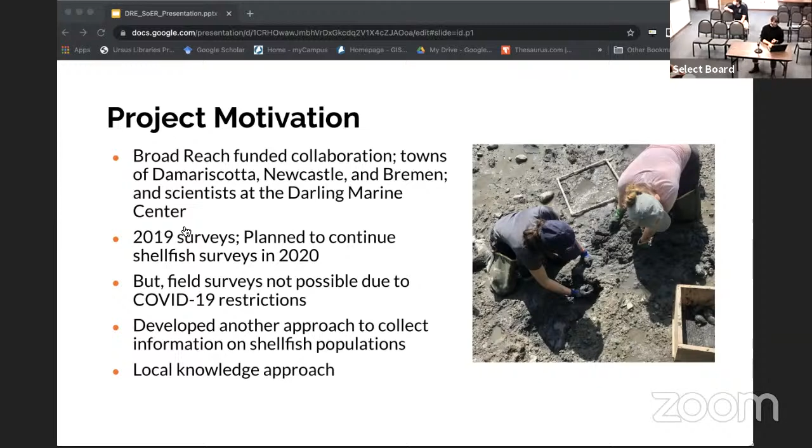So we had to take a moment to step back and think, what can we do where we can still be collecting information about what's happening in the river, but from a safe distance? We figured, why not ask the folks who live and work on the river about what they're observing, so we can collect local knowledge about what's happening and use that to support decision making. That led us to develop a project where the primary goal was to document local knowledge from the people who know it best about the Damariscotta River.

We were looking to collect information about what's changing in the biology, what's changing in human use on the river, particularly what's happening with the clam mudflats. We're also interested in identifying areas of importance. What areas are important for harvesters? What about recreational fishing, aquaculture? What's actually going on? And with a lot of activity going on the river, where are folks interacting and where are areas of overlap?

So to do that, we created a local knowledge mapping study, and this had two parts. We recruited folks over the phone. We had a list of harvesters, a list of local contacts that people recommended. When folks agreed, we sent this map packet in the mail. It had a booklet that looked really similar to the Maine Atlas roadmap, with zoomed-in pages of different sections of the river. Folks could apply stickers showing the locations of shellfish, if they were a shellfish harvester, or different use activities if they were a fisherman or a rec boater.

After folks completed that map booklet, we then did a phone interview with them, gathering additional context about what changes they've observed, what has changed as far as their harvesting behavior, and other concerns they might have.

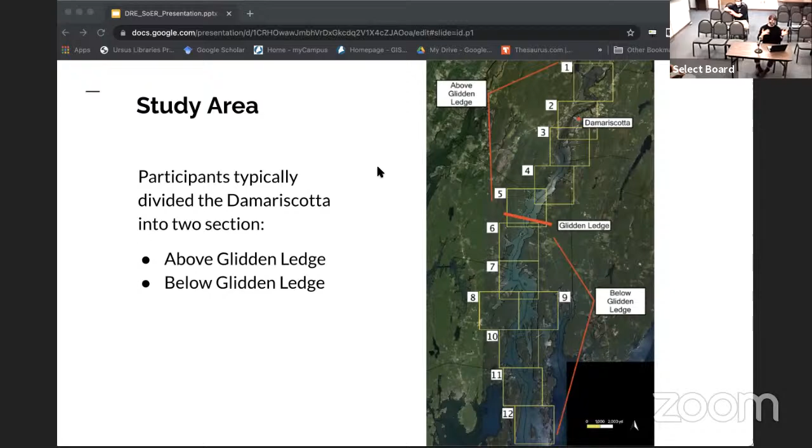Just a quick orientation, because the Damariscotta is a big river—when our study participants typically talked about the river, they divided it in half. Up at the top is the Damariscotta town landing and the bridge, and in the middle we have Glidden Ledges, which is the landmark people use to divide the river. They'll say above Glidden Ledge is the upper river, below Glidden Ledge is the lower river. So we'll be using that today.

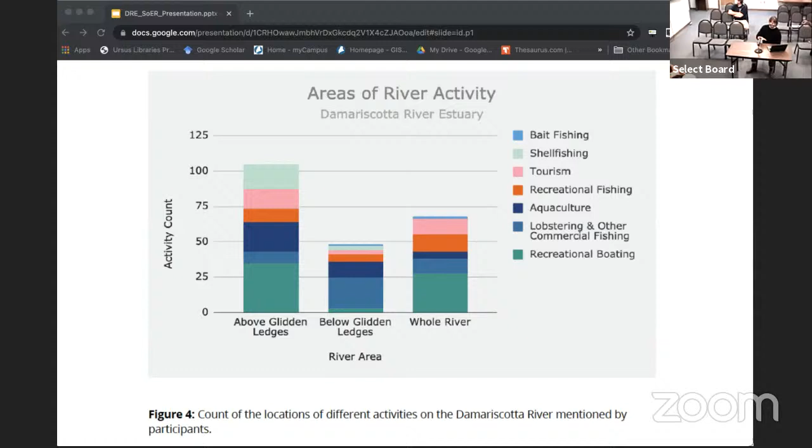One of the really neat pieces we got from the interviews was interesting context about the shellfish species. When talking to harvesters, we got information about which species they're targeting. The main targets are softshell clams and oysters, and then some folks are also harvesting quahogs, and on low tides, razor clams.

We also heard a lot of great information about what habitat they look for, because they don't just go out randomly in the mudflat. They're targeting particular areas with a certain sediment type, a certain look, or a certain zone in the tidal heights. This was really helpful because when we got back into the field this summer, we used this habitat data to target where we actually surveyed, since we're trying to target the shellfish resource, not the entire mudflat. This helped inform all of our survey methods.

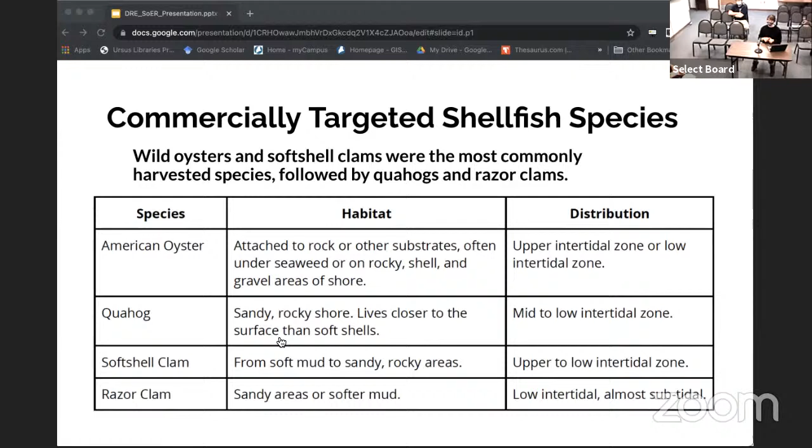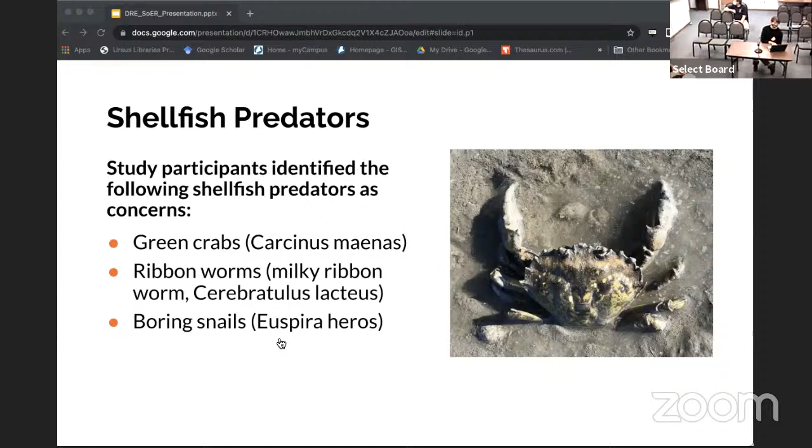Second, folks saw decreased waterfront access as a threat, meaning walk-in access to the flats. Many folks are now buying boats instead, but then they sometimes have trouble putting their boat in at the town landing to get out to the flats. And finally, predation pressure, those green crabs, snails, and worms they're worried about as a threat to the resource as well.

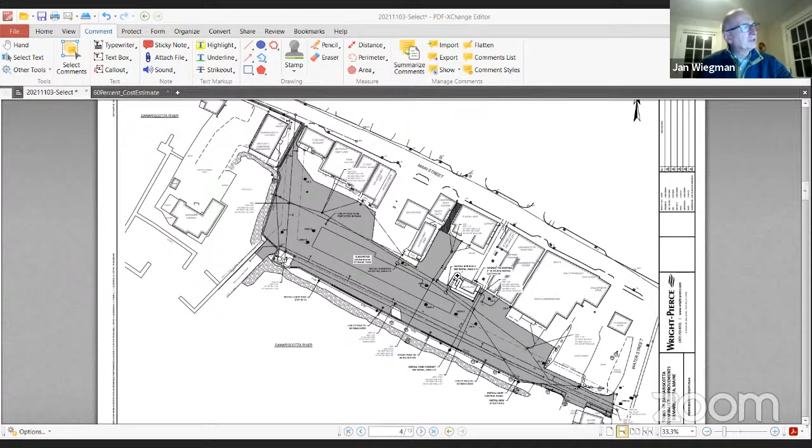So what we've done is looked at putting the infrastructure in the ground, to put the primary electric underground and then have it come up at 2 locations within the existing parking lot to aerial poles. Essentially there's another aerial line that runs further in the parking lot that feeds these buildings in here and in here. So what we're going to do is take it overhead to here, then come underground and come up these 2 poles, one near the restroom and one near the old print shop. That minimizes what we have to do underground.

We have reviewed this plan with CMP. They've got a few refinements, and we'll add those in as we move forward.

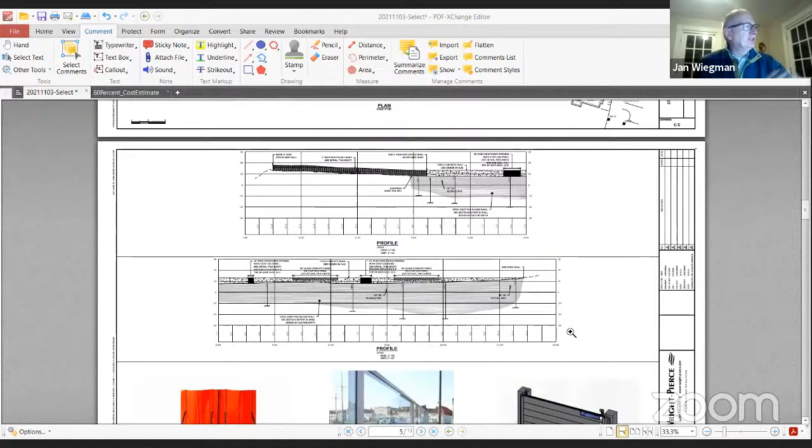This here is just a sense of what the wall profile looks like. And then in terms of the deployable wall on the west side, it's a rolled up wall system that has fabric and reinforcing slats in it, as well as cables and other stay materials. So it forms like a large L with the flat portion of the L facing the water, and the weight of the water on that, along with the stays, help keep this wall stable. So it's rather quickly deployable and also provides that protection.

In the notches in the wall, we've got 2 options that we're looking at. One is a visibility panel, which is a high-strength flood-rated glass system that'll remain in place all the time. Another substitute would be a lower cost option, stop logs, similar to what you see in the figure on the right, which would be used both in the openings in the wall at the boat launch and at the pedestrian access to the park. We could also use this system in the notches in the wall and the view panels.

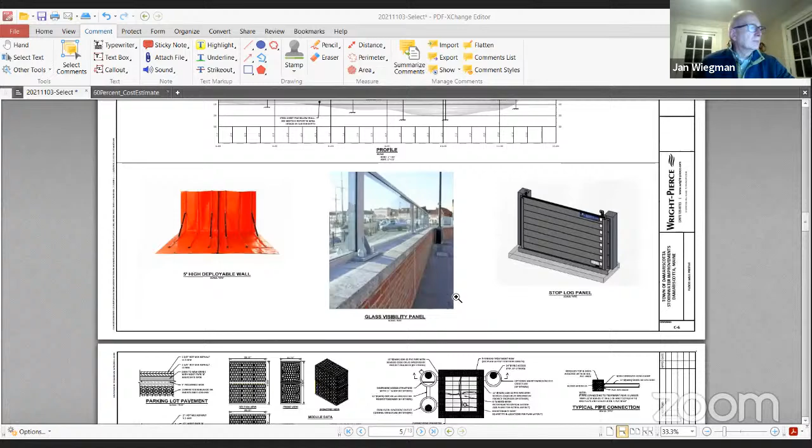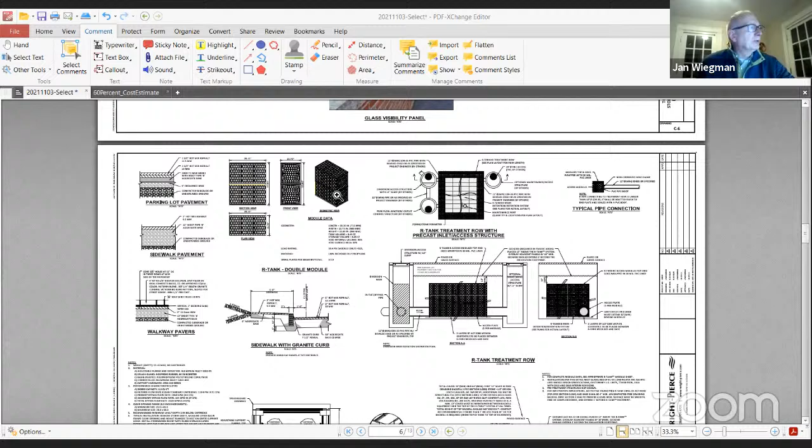I just wanted to give you a quick idea of what these underground storage, stormwater storage modules look like. They're basically large plastic crates, suitable to be driven on as long as you have enough cover over the top. They're strong enough, tested, and installed under parking lots in hundreds of locations. That forms your storage volume for the water you're temporarily storing. It fills up and then drains out as the floodwater recedes and the tide goes out.

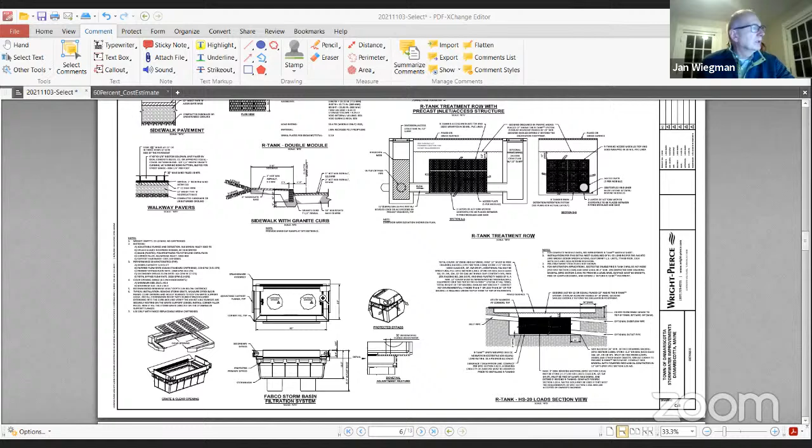The other thing we've included in this 60% plan is a filter system in every catch basin. We heard a lot of feedback in our meetings about cleaning the water, and this is an opportunity to help clean the water as it runs off the parking lot. We've looked at a variety of ways to do that, and this is one of the systems we feel is well suited for this application, where we don't have a lot of area for surface ponds or additional underground treatment. It's also fairly cost effective.

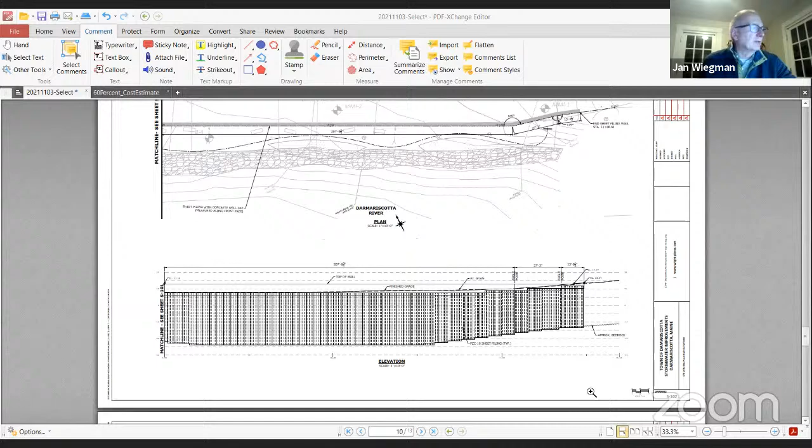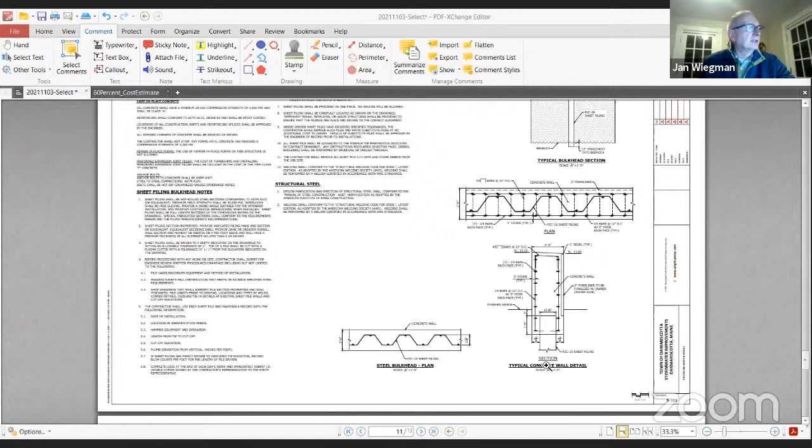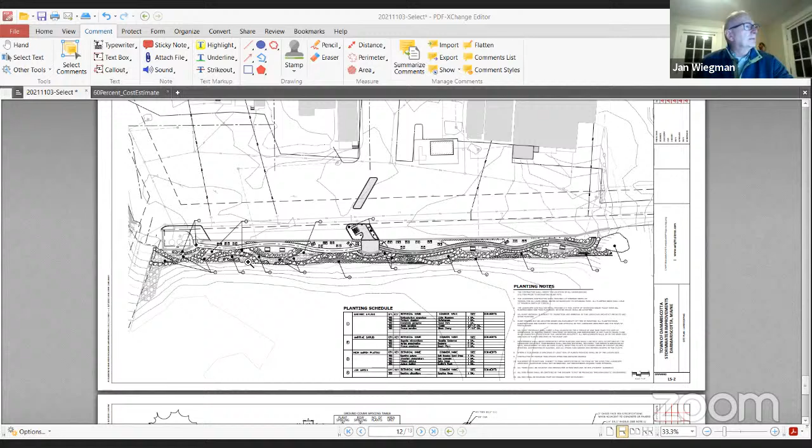Again, the park area is going to incorporate living shoreline elements. We're going to create areas with vegetation on the sloped sections, bringing up the grade with larger rocks and creating sloped areas that we can vegetate to help with that living shoreline element. This will enhance the habitat as well as the aesthetics of the area right along the shoreline.

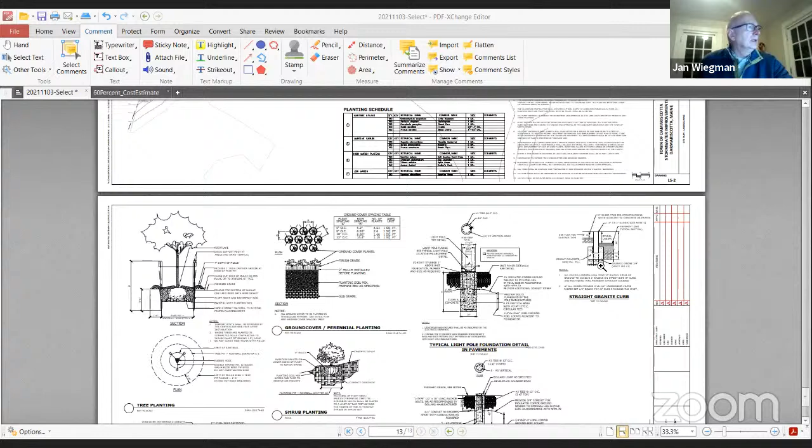And this is kind of a depiction. It's just a typical type depiction. These slopes are likely to be much steeper and the vertical pieces are going to be much steeper, but those are the types of things that we'll be incorporating into the overall plan.

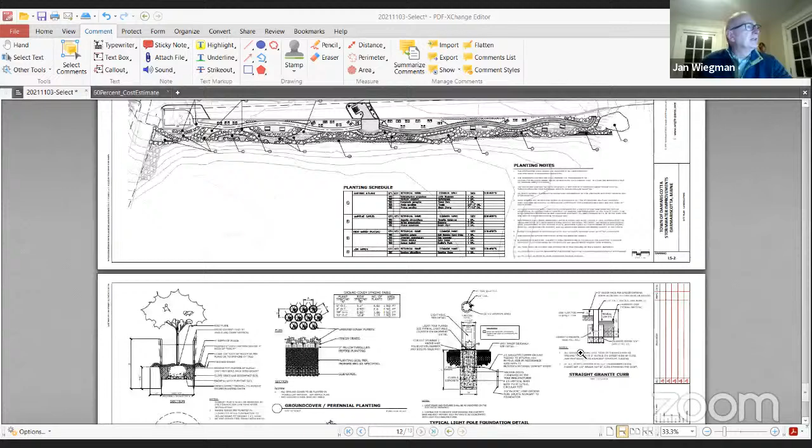We do have amenities in this plan, and I apologize for rushing through that, but we have individual seating out here, which would be like Adirondack type chairs. We have picnic tables, kiosks for informational purposes, and a flagpole proposed here. A lot of this is going to be, we'll want feedback on this particular plan to make sure that what we go forward with is more in keeping with what the town really wants.

We've shown a bike rack in this at the main entrance here as well, incorporated into that entrance design.

In terms of materials, we're looking at a stabilized crushed stone surface for the walkways. We've got pavers for the main entryway where you'd have a lot more traffic. As it comes from the park area into the parking lot, those pavers would carry into the entrance area of the parking lot. We've also talked about incorporating either an aisle for handicap cars that could also be used as pedestrian access through Taco Alley down and into the park.

So that's a possibility. Currently there are a few handicap accessible parking spaces within the parking lot, scattered in different areas. This would tend to concentrate them in the center. We have to discuss that and make sure that's the right location, or do we still scatter them and make accessibility here either through the parking spaces or with its own dedicated aisle.

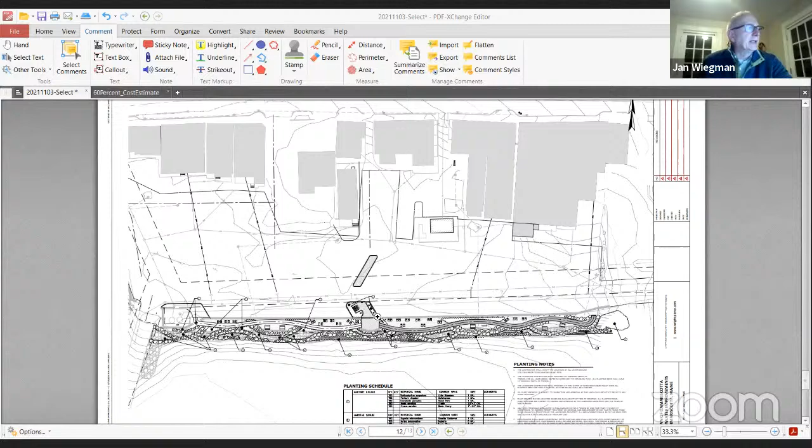One other thing I didn't touch on in the initial site plan, excuse me for scrolling back up through, is the access to Water Street and the access enhancements through Taco Alley. This is going to be a paver type surface that connects to the sidewalk at Main Street and brings down through Taco Alley into the municipal parking lot in this area. Then on the Water Street eastern side, we're showing a sidewalk that would start basically at the end of the wall and then come up the side of the access way to Water Street.

There would be some sort of crosswalk in this location, or slightly around the corner here. We're just looking at what might be the best solution, but we may want to come around the corner and cross here. This is in combination with some stormwater improvements we're also making up here on Water Street. There's some structures up there that are in really tough shape, but we'd look at doing those enhancements as well.

And then I don't know, Mike, if you want to add anything to any of this. The next piece is the cost estimate, but if you'd like to add anything to any of these. You summarized it fantastic, Jan.

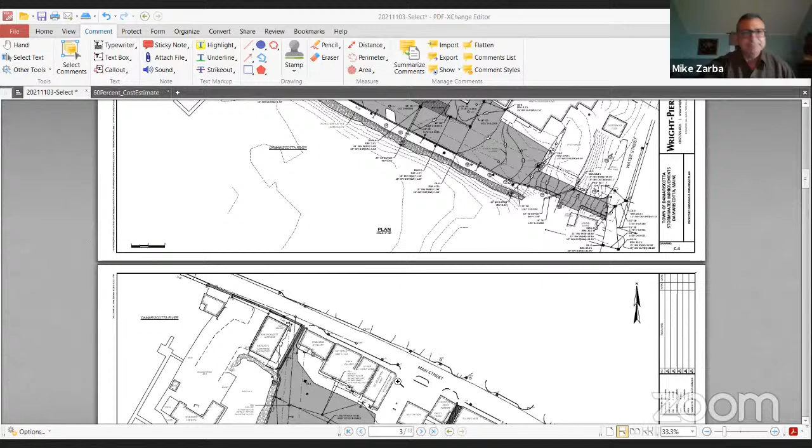The only thing I would add, I think I didn't hear, was there's a kayak storage rack as well, over near the sewer pump station that's also being proposed. Right in that area, correct, right by the sewer. There's an existing one there now, and this plan does take away one of the parking spaces here, but we can certainly discuss that. I know that parking spaces are a valuable commodity in that area.

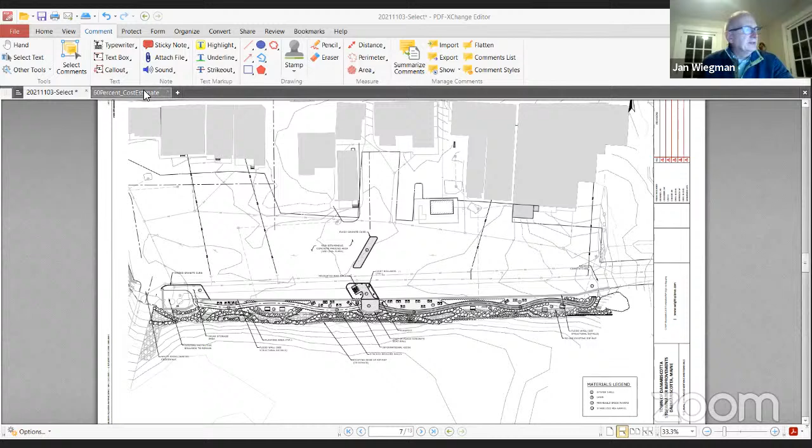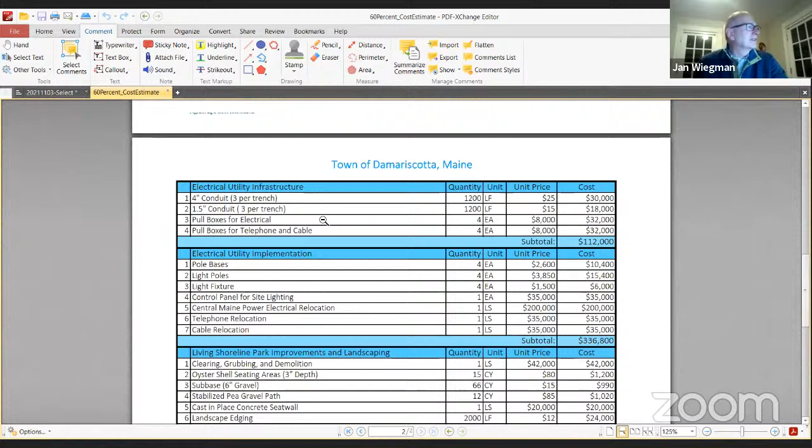So the next portion of what we looked at, let me zoom out on this just a little bit. Can we ask a couple of questions on the design? Sure.

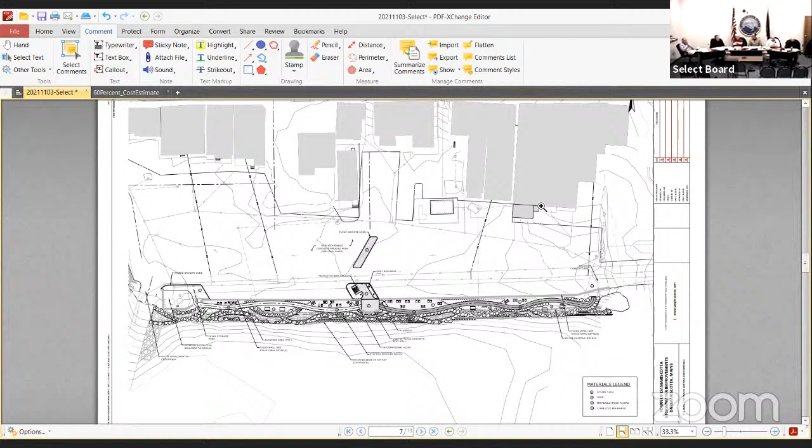Having sat in a couple of public meetings about this, other than the requirement to receive the grant, there's not a lot of support for the 5-foot wall. And there also isn't a lot of support for the glass wall on top. But that being said, could you explain the length of the openings? Because I can't see that on the diagram.

Hopefully this will give you a better idea. The openings are in blue. We don't have the blue coloring shown here, I don't know if you can see that or not. I'll zoom in a little bit more. Is it the hash mark portion of the one you gave me previously?

Yeah, Jan? Yes, they're a hash mark, and they're about 80 feet long, and they're 2 view corridors, plus you have a 20-foot opening here at the entrance to the park as well. We've offset these about 30 or 40 feet either side of that entrance.

Those are designed to at least allow some or better view of the water from the parking lot. The other thing we're doing is raising the grade in the parking lot slightly, to accommodate all the different things we're doing there in some areas. So the differences will be somewhat dampened by those raised grades in terms of the view for most people.

Another question is, on the columns that support the logs that slide in, are those going to be in place all the time, or are they part of the system? That's a good question.

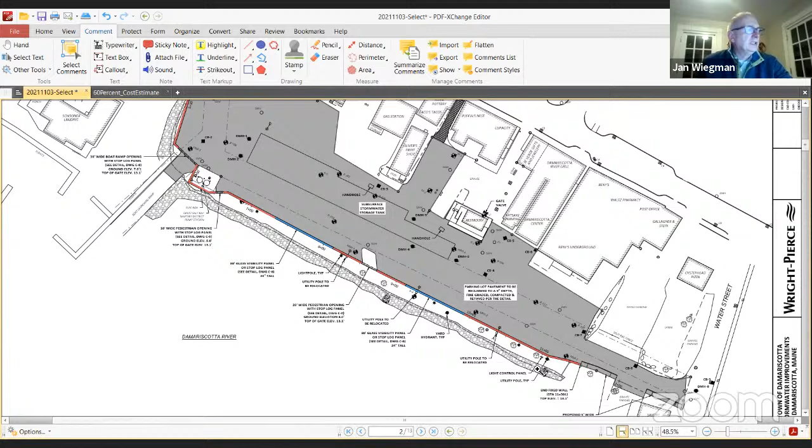If you don't mind, I'll scroll down to the profile of the wall over here. You can see at this end the wall's at zero height in terms of differential, and then it gets to full height probably around this location, relatively close to that opening, and then it slowly tapers down as the grade climbs.

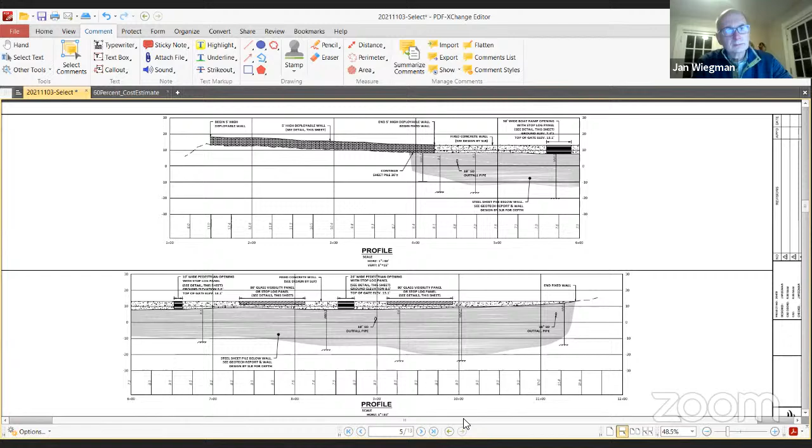And lastly, Misery Gulch over there from the boat ramp, there's a long run towards the red building. Is there any opening in there? Along Misery Gulch, there's no opening in this particular area.

Would there be? Well, we sought some input from Matt, Bob, and George, and from the public, and we didn't hear a strong desire to have an opening there necessarily. So we didn't include one.

That wall could be an opportunity for some other type of use as well, like informational boards with historical stuff or other things you could put there. But there is no structural reason why it couldn't be an opening there, is that right?

That's correct. The only other consideration is that the more openings you have, the more time it will take to close those openings in the event of a storm. So just keep that in mind. That may not be very often, so it may not matter that much, or you may have sufficient hands to close all those openings relatively quickly. But keep that in mind as another consideration.

Do you have any information as to how long it takes to put one of those temporary walls in place, from other towns that have used them? We don't from other towns, but there are some videos available demonstrating similar types of closing of similar gaps. What I recall, I watched a video on closing a gap that was about 20 feet wide with a center post that had to be put in, about 5 feet high.

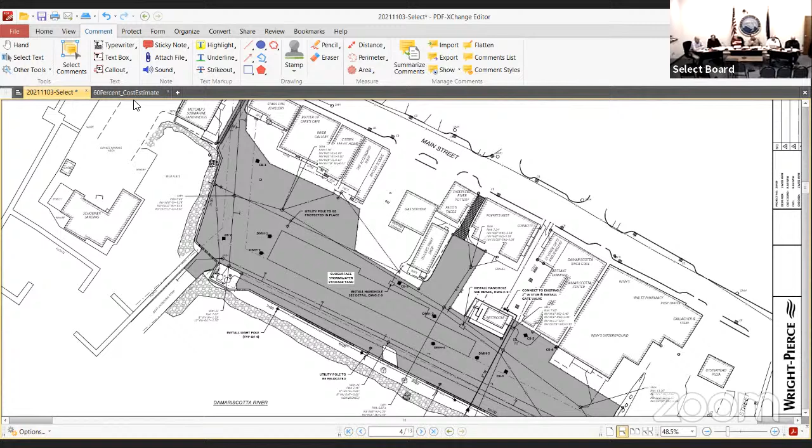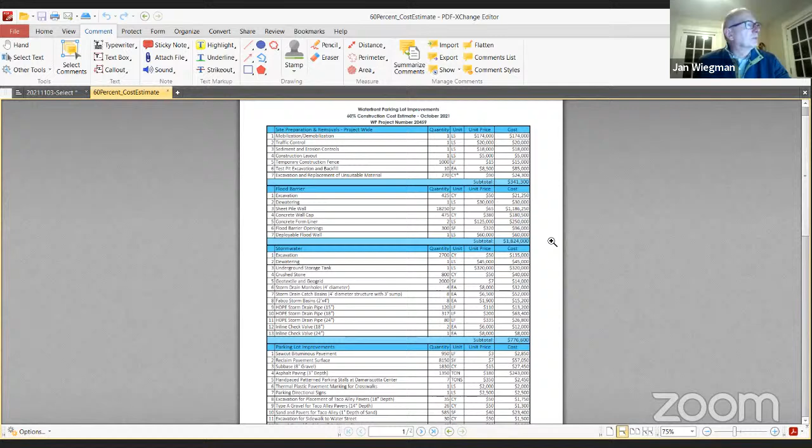Yes. So what we've done is put together, I hope you can see this, and if not I'll zoom in a little bit here. Each of the board members has a copy. So they do. Okay, great.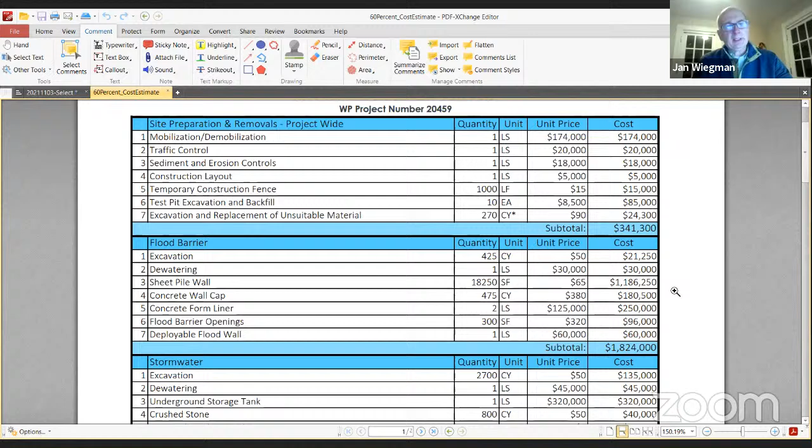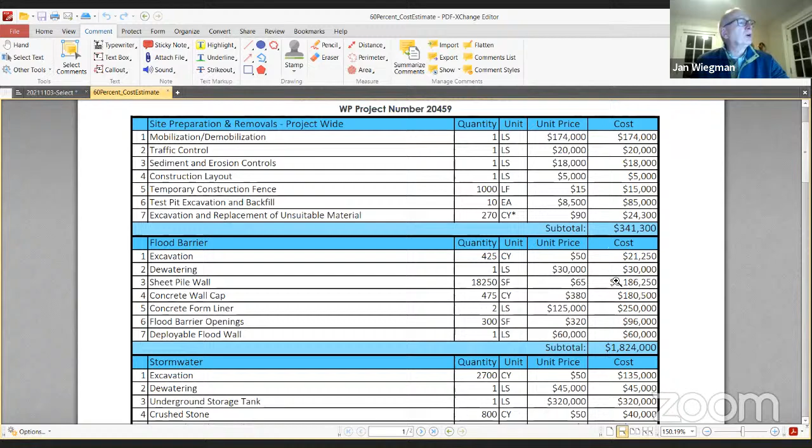So what we've done is gone down and chunked the project into different components. The first one is really project-wide. These are things like traffic control that has to be done throughout the overall project, temporary construction fence, erosion control that you'd have to do for any or all of these components. So that's the first section.

The next one is the flood barrier itself. So this is the wall, the concrete, that deployable wall we were talking about, any kind of openings, filling those with stop logs. There's going to be some excavation required because we need to go down a couple of feet, 2 or 3 feet, in each location along the entire alignment of the wall, so we can install and form the concrete and so forth. So all of that comes to about 1.8 million for that particular component of the project.

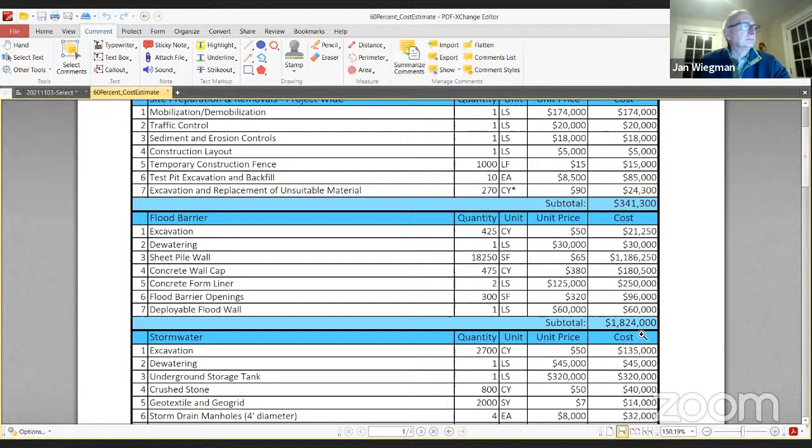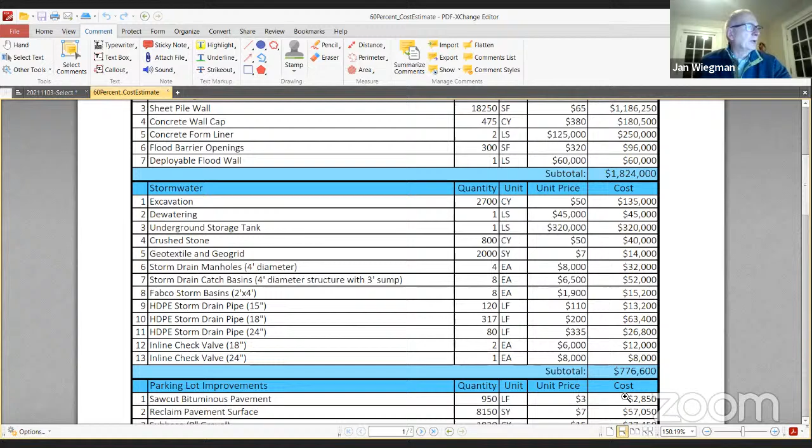The stormwater component includes the tanks, the new stormwater lines, putting backflow preventers on the outlet locations that we have for that stormwater. That comes to about just under $800,000.

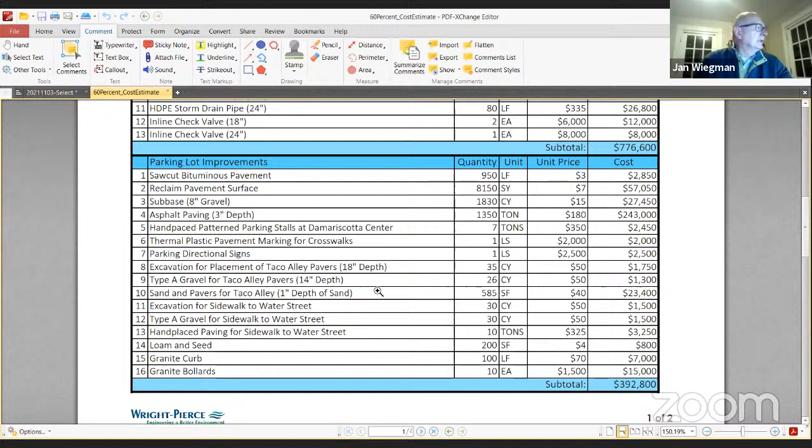The parking lot improvements — this is the paving of the parking lot, first reclaiming the surface. Some of this is going to be disrupted by the installation of the tanks, but we tried to account for that in the overall cost. This incorporates the improvements to the sidewalk going up to Water Street, the Taco Alley sidewalk, and some granite curbing we're putting in, and that comes to just under $400,000.

Moving down into the electrical infrastructure, we broke this out into two different phases because if your funding doesn't match the funding for the overall project, we'd certainly have to cut something out, and that's likely to be the wall. So the critical pieces for the electrical infrastructure would be conduits, pull boxes, things like that, which would go in with the parking lot reconstruction, and that comes to about 112,000.

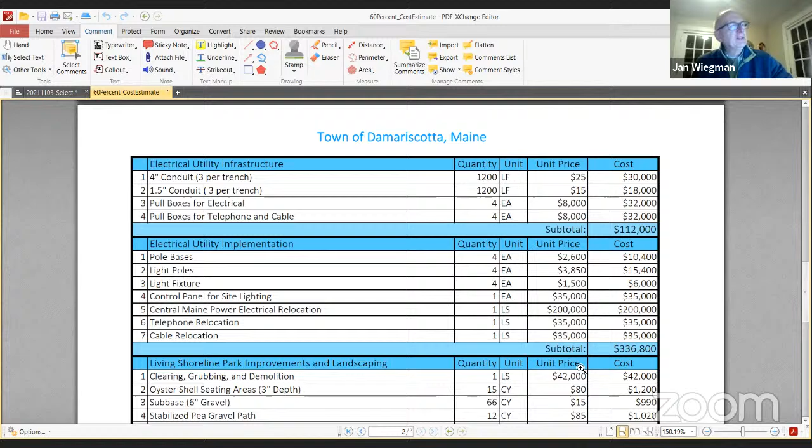Then followed by actually moving the power over and installing some site lighting where you currently have site lighting on those 3 poles, and that would be about 330,000. That would come at the time when you're doing the wall project, because CMP is unlikely to — or they might, if you wanted to take that on now, but they were concerned that their pull boxes would get flooded with salt water. So if we were able to do this in a staged way, we broke these out into 2 different components. They could go all as one too, if CMP would get comfortable with it. We had a meeting with them this week, and I think there's a way to do that. So that was encouraging.

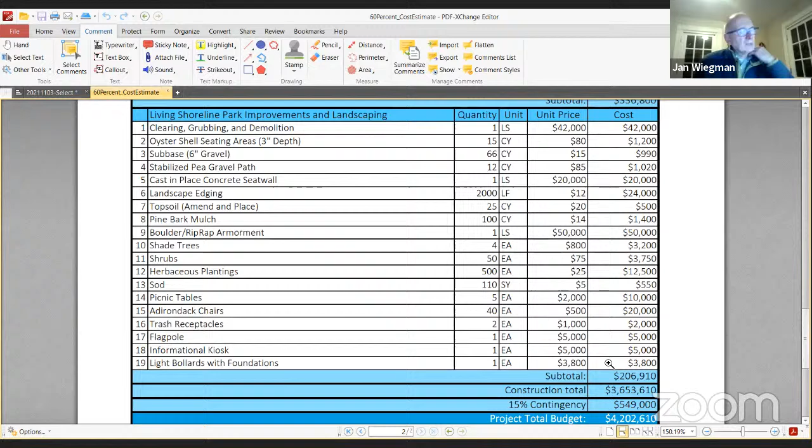And then the living shoreline and landscape improvements came to about $200,000. Some of that work really needs to be done — the living shoreline work, because of the restriction in space we have with that park area only being about 12 or 15 feet wide. Working to place new stones and do that sort of work, you really can't do it with the wall in place there, so you'd have to do that before the wall. We built in about a 15% contingency, and the total project cost came to about $4.2 million.

One option would be the stop log, and the other would be the glass flood barrier. As you can see, the glass flood barrier is quite a bit more expensive, but we wanted to show you those numbers. Currently, the town has about $2.9 million, including the contingency. If we were to remove just the wall component from the project, that would bring it down by about 1.8 million, to somewhere between 2.4 and 2.6 million, depending upon what you use for the visibility panel option. So we feel that's potentially one way to phase this, and then seek additional funding for the wall portion, which has been suggested to the town by EDA as a strategy.

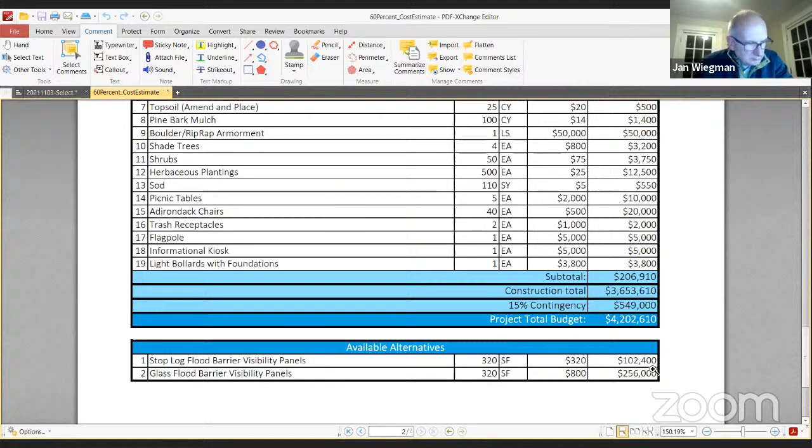Jan? Yes, a question on the flood barrier. The concrete form liner, number 5, that assumes the etching or some type of texture in the wall, correct? That's correct. That could be brick or stone. There's a whole host of options. It could be some pattern that's repeatable, and they would just move the form liners. As they move the forms down, the form liners would go down, and there'd be some sort of a repeating pattern.

If I could, I'd like to address the issue of phasing. The most important priority to the town is to get that drainage repaired. And then, of course, we want to do the flood resiliency improvements for what's going to occur with sea level rise in the decades ahead. So with that in mind, we've talked extensively to EDA about the idea of having two phases. I just clarified this again this week, got it in writing, that EDA would like us to go out for bid with the entire project, but also have an alternate bid for the flood wall.

They would like, and we would like, assuming that the flood wall is going to come in anywhere close to these prices, for us to go out with that bid without the flood wall, and go ahead and construct the improvements minus the flood wall. That way we know exactly how much we have left over and we can apply for additional funds. So that was a key milestone in our discussions with EDA, that they're not only amenable to that alternative, but they want us to do that, because they want to be fairly certain what all the other elements are going to cost before they approve the flood wall.

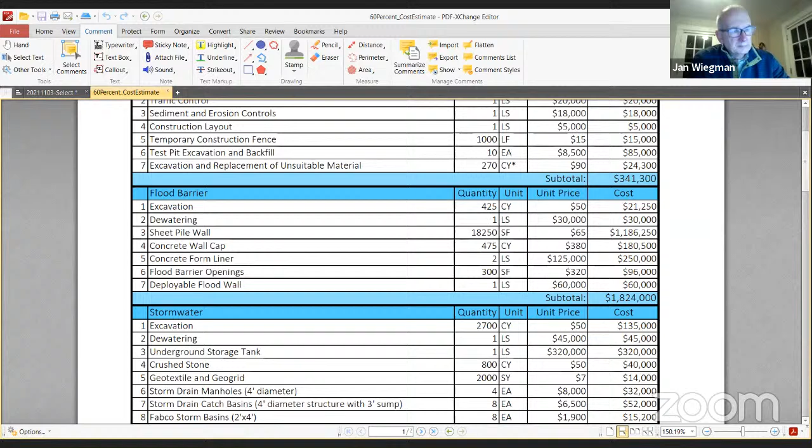The big downside in not doing the whole project at once is you've got two sets of mobilization costs, and you have the potential for having to tear up some of the first phase product to start the second phase. In other words, you're installing this huge wall with the pilings, and you've got to drive over that, and you may have to tear up some of that asphalt that you put down a few years before. So that is a downside, no doubt about it. Yeah, we just want to account for it, be realistic about it, but it's...

Are there any questions from the board at this point on budget or costs or anything? I'm still processing. I see in your eyes you've got some questions there, Josh. Yeah, it's a lot to take in.

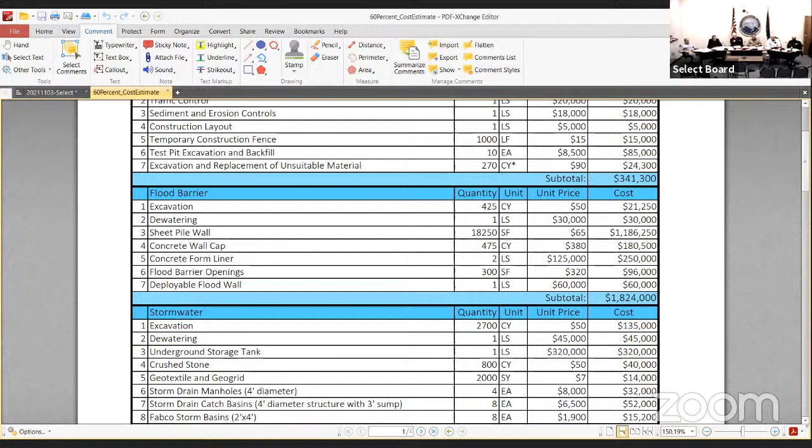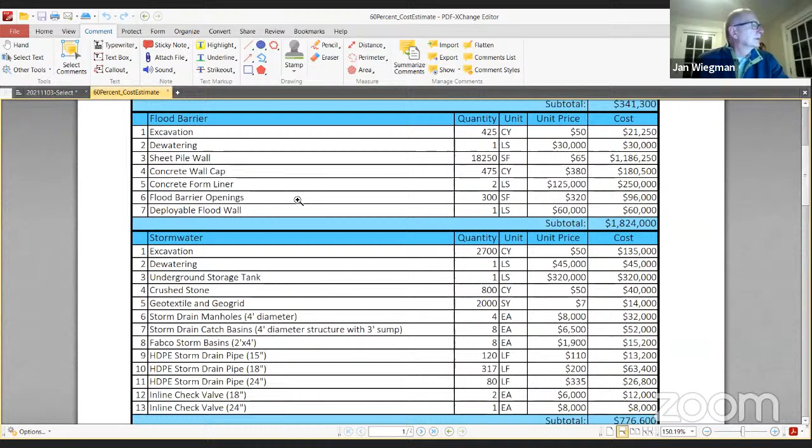I have a question on how you arrived at 3 inches of hot top in the commercial parking lot. That was arrived at because, first of all, we're going to have a better base than we currently have, and 3 inches is commonly what's put down. Ideally you might want to go a little heavier, it depends on what you have there, but we felt that was at least the minimum.

We should factor in above minimum then. It seems like a lot of commercial parking lots get a lot more than 3 inches, especially with heavy use. That's something we can certainly look at, increasing it to something greater, especially if they bring heavy equipment back in 2-3 years. We definitely don't want to skirt the minimum for the long term.

The only concern I have is for snow removal. It's going to change that aspect completely, isn't it? It shouldn't - right now the only place we're permitted to push snow is the launch area. I know that, and I know where some of it goes, but our permit doesn't allow it to go anywhere but the launch and the Howard and Bowie parking lot.

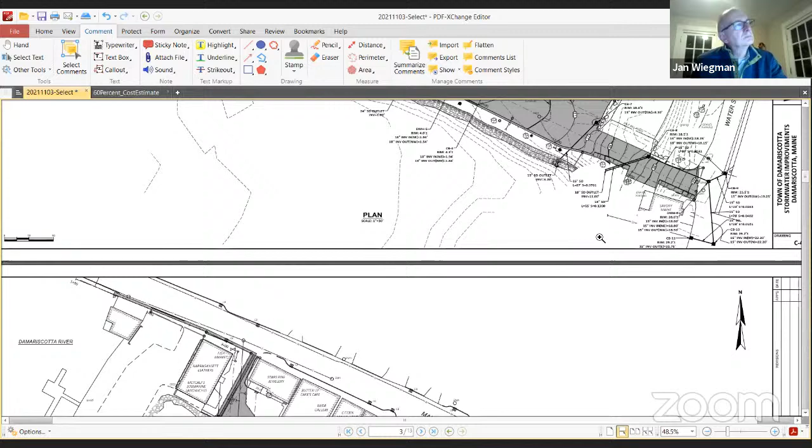I was just going to ask about the area approaching Water Street, on the upper end of the parking lot - that's a tight squeeze in there. Looking at the picture with the added sidewalk, I don't know what our easements are and how that overlaps, Matt. Did you measure it? It definitely needs a change up there, but is it feasible - let's discuss it.

I'm going to meet with Jan and Mike out on the site. I've talked to the owner of that property several times, and although this doesn't show us acquiring any more right of way, the owner is willing to grant us right of way for that. What we talked about, and this is what we need to see on site, is that if we agree to pave her little pullout there, she would give us the right of way for the sidewalk.

Jan wanted to take a look at it, but I also felt the driveway is way too tight to try to put a 5-foot walk in there. It looks good on the plans, but in execution it might be a little tight, so we just want to take a closer look at it.

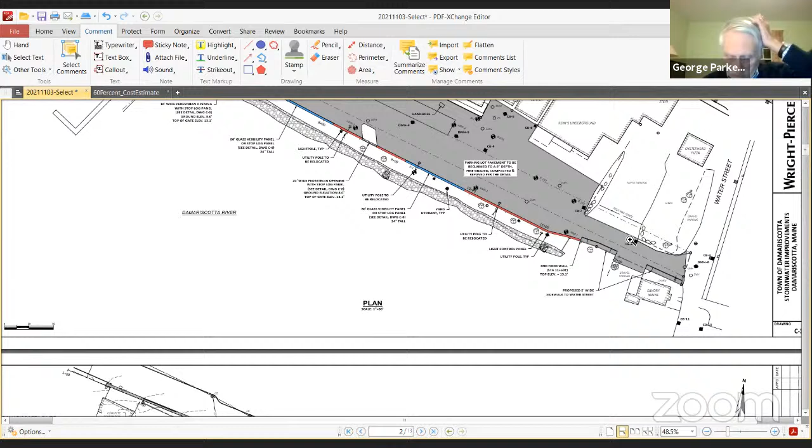Tom just asked me what was on the other side, the north side of that lot - that's the post office parking. No, it belongs to this company, that's a grassy area there. Is that what you're talking about? Yeah.

We just need an on-site look, and I don't know if that would work, but that's something we could look at. Did you catch that, Jan? Yeah, I did - as a matter of fact I was out there this week looking at that myself. It's currently not used by the property owners, just open space - weeds, or open space depending on how you want to put it. Open space sounds nicer.

Yeah, okay, there's a lot to process here.

Any other questions at this point? Josh, did you want to take more time? You may want to make a list through the documents that we sent out and maybe take action on this in 2 weeks? That'd be good. I just don't want to hold up the works, and I know there's timetables.

Jan, what's your take on that? I would rather have you be more comfortable or have time to develop questions, so that we get good direction before we really launch into some other things. In the meantime, we can certainly come out and take a look at a couple of these areas you've already mentioned. Yeah, let's do that. That way we can really process it now that we've had the presentation, and any questions we can write them down and get them answered beforehand.

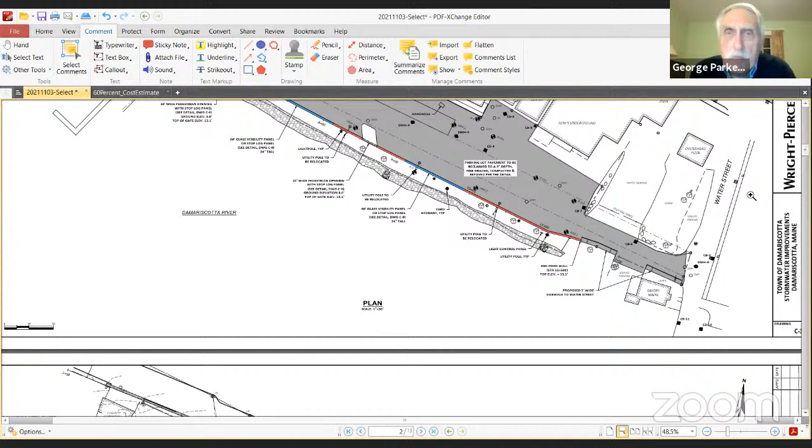Matt, did you want me to talk a little bit about the meeting that we had the other day? Yeah, that would be good. Well, Jan and Mike are on the line as well. Is that okay? Yeah, we'll move back. So this is the historic, the historic elements. Tom attended that as well. So we'll have George start a little report on the waterfront project, historic elements focus group meeting.

Well, we have a committee made up of myself, Barnaby Porter, Haas, Sherry Sage, Sally Bodett, Tom Anderson was there, Louis on the committee. He didn't make it the other day, but there were a number of really good suggestions.

Tom had suggested maybe considering doing a couple of specialty panels in the form liner part, maybe by the main entryway, that actually depicted the scene of a ship or whatever. You can do these - I don't know if Wright Pierce knows how much extra, if you had like 2 or 4 of these kind of panels, how much would need to be allocated for that. Because obviously we're not going to design them at this point. It would be down the road a piece, but that's one possibility.

Valerie Seibel, who was the chairman of the Historical Society, suggested using the wall along Misery Gulch and put some plaques up there that would explain some history of Damariscotta and that sort of thing.

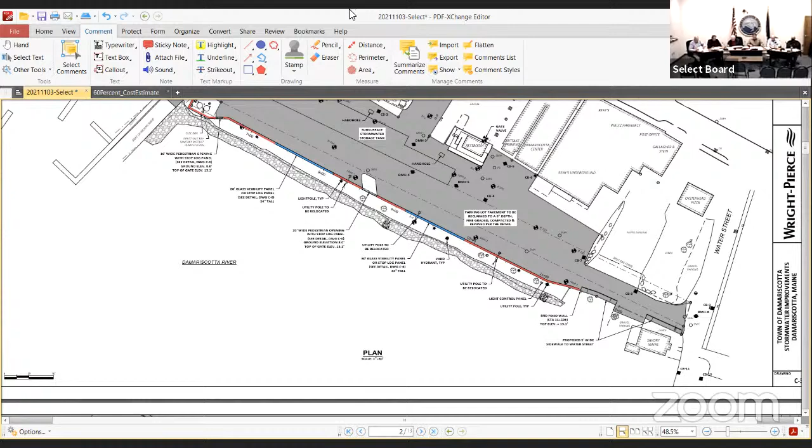Matt, did you want to touch base on your October 28th meeting with the DOT? Maybe we can shut off the Zoom portion, Jeff's off on this. Okay, and like Tom and Mark to give their take on the meeting as well.

I guess the highlight of the meeting was the fact that Maine DOT has come up with a design for improving the safety aspects of the intersection at Belvedere and the bypass. They've actually dedicated the dollars in the third year of their 3-year plan, 2024. I think we were all very happy to see that the idea they put forward was a roundabout at the intersection.

My initial reaction is very positive, but I've been talking to a few people since then about that idea, and I'm getting a mixed reaction. I guess what I'm going to suggest is that Maine DOT come to the meeting in 2 weeks and provide their PowerPoint to the full board. People can either watch it here or watch it via YouTube, and you could see the logic and hear about the other alternatives that they looked at. So that's my take on it.

Mark, I was going to ask you, you want to say something? Yeah, I think one of the things we talked about was if we were to make a dead end street coming down from Business Route 1 down Belvedere, and then let them spend their money up in front of Hunt's to a roundabout, that would actually take care of that situation too. But I think they felt like the safety factor was higher down at the project where they were interested in. Some of them there felt we should look at that a little closer, maybe. That was the take I got on it.